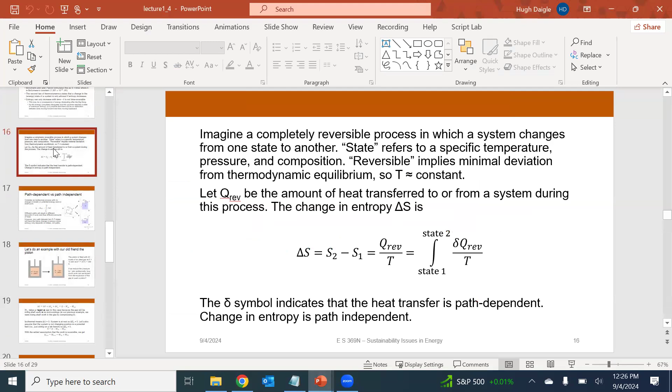Okay, but anyway, back to our piston. Okay, so just to recap, there's a question back there. Yes. It depends. The answer is there can be, but it depends a lot on the details of how the electricity is being generated, from what non-renewable source. So yeah, in the extreme case, and it's kind of like what we were talking about with electric vehicles, right? If you're running off of 100% coal generation, then no, you're not going to come out ahead. If you're running off of a typical mix like what you have in the US, then yes, you will come out ahead. But obviously, the most ahead that you can come out is with 100% renewable.

And one of the reasons that this company was planning to do that is because there are significant tax incentives in the 45Q tax credits in the Inflation Reduction Act for carbon capture using 100% renewable. That's the most tax rebates you can get, by that technique. So from a financial standpoint, that's why they were doing that.

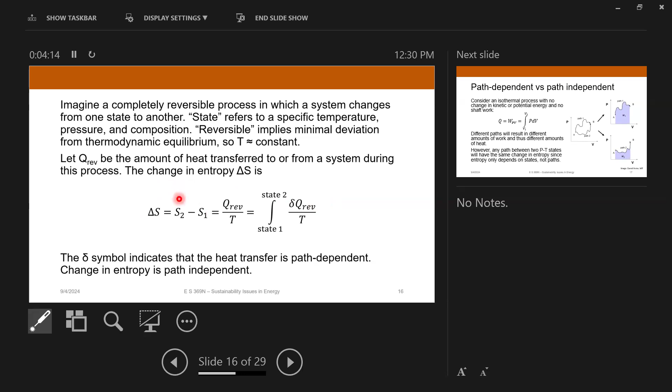Okay, so we're using this lowercase delta here to explain that the heat transfer does depend on the path you take in pressure, temperature, or composition space. And I'll explain this on the next figure. But the change in entropy is independent of the path you take in that space. So here's what that means.

So don't worry about this here on the left right now, but let's imagine that we are changing states simply in pressure volume space here. So you're going from state A to state B. And there's an infinite number of ways you can do that in pressure volume space. You could take path 1, which looks like that. You could take path 2 that looks like that. You could take any number of paths through that space.

And if you're an isothermal process, the heat transfer is simply going to be equal to the pressure volume work. Remember, we derived that on Friday from the first law of thermodynamics. And you get that work by integrating between V1 and V2 over the path you take in PV space.

Okay, and where you get the path dependence is because remember that when you're integrating, you're just calculating the area under the curve, right? So the area under path 1 is going to be larger than the area under path 2. That's explained very nicely in this figure over here. So to travel on path 1 is going to take more work than traveling on path 2. So that is a path-dependent process.

But overall, the change in entropy is going to be the same because it really just depends on the difference in the two end states, right? You have a certain number of configurations that the system can attain at point A, and you have a different number at point B. But that doesn't depend on how you get from point A to point B. That is a path-independent process.

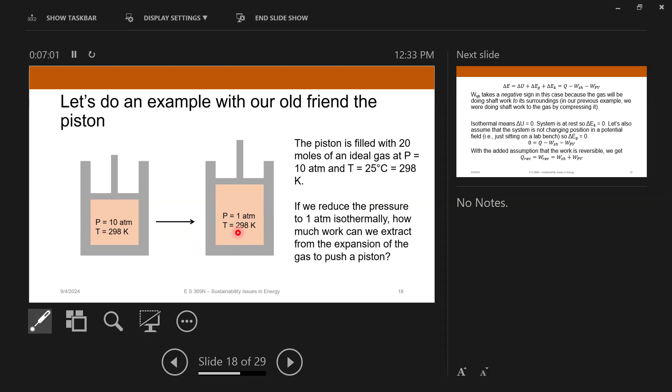Now, if we do an isothermal expansion here where we reduce the pressure to 1 atmosphere, so this is our end state, 1 atmosphere, 298 Kelvin, how much work can be extracted from that gas expansion? Okay, so we're going to go back to the first law of thermodynamics.

So the change in energy is going to be the sum of the change in internal, potential, and kinetic energy. And that's going to be balanced by the heat transferred to or from the system, and then the shaft work and the PV work being done by the system. And remember, these are negative signs because the system is doing the work on its surroundings, right? It is expanding, it's pushing stuff out of the way.

Okay, now because we're isothermal, delta U is 0. We'll assume the system is at rest, so the change in kinetic energy is 0. Let's assume that we're not changing our position in any kind of potential field either, so change in potential energy is 0. So that means that the sum of these terms over here has to be equal to 0.

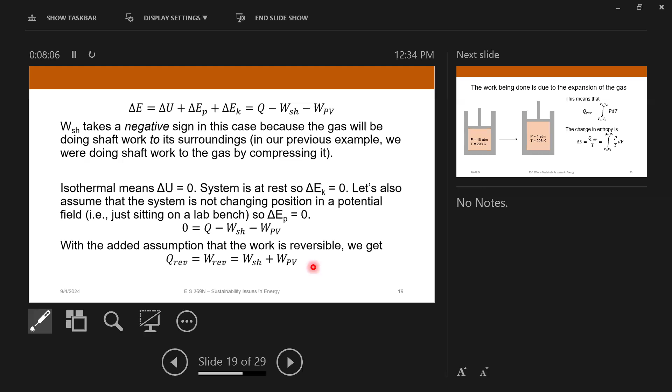And so that means that the heat transfer, we'll call that reversible heat transfer, is going to be equal to a reversible work term, which is just the sum of the shaft and the PV work, okay? Now, the work being done here, it's due to the expansion of the gas. And so remember, as we talked about before, the heat transfer, you get that by integrating along the path between the two states.

The composition is the same, the temperature is the same, but the pressure is different. So again, remember your PTX, we're changing the pressure in this case. So these are two different states here. And the change in entropy is just going to be the reversible work divided by the temperature, and we can substitute that into our integral here.

So if we have an expression for pressure and temperature as a function of volume or some way to relate those three things, we can actually come up with an analytic expression for this integral, okay? And so that type of relationship that links pressure, temperature, and molar volume of a material is called an equation of state. And the easiest one that we've all learned is the ideal gas law. That is an equation of state, PV equals nRT.

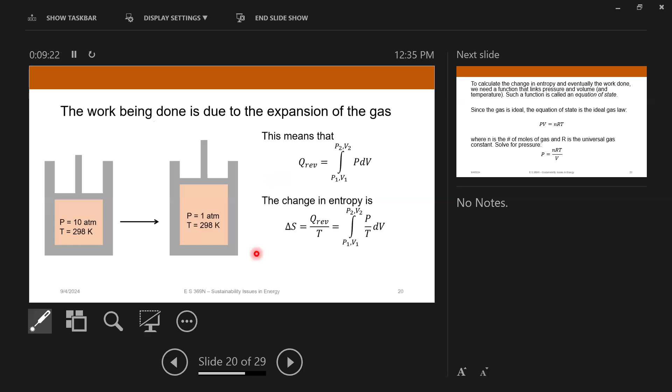And so we can solve this for the pressure like this. And now we can substitute that in here into our integral. And so this is what we get for the change in entropy. So I've substituted the ideal gas law in here, and then the temperature cancels out. So now it's just in terms of molar volume. And so the change in entropy is just given by the molar volume at the beginning and at the end.

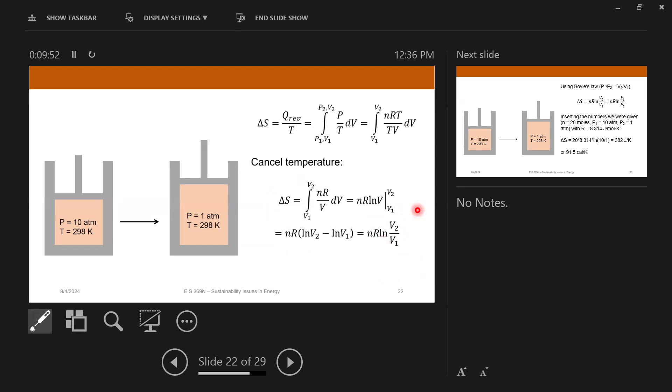And so again, you can see there's no path dependence here in the entropy. All I care about is what are my end state molar volumes. That's the only thing that matters here. Okay, and so now we can make a substitution for volume instead in terms of pressure using Boyle's law. And now we can see that the change in entropy is done by just plugging in all the numbers we get. And so we are getting a change in entropy of 382 joules per Kelvin, or 91.5 calories per Kelvin.

So that's how you express entropy. It has units of energy per temperature. So that's kind of an interesting way of thinking about it. So that is the change in entropy between these two end states. And again, you can see that the delta S is positive. So we have increased the entropy of the gas here.

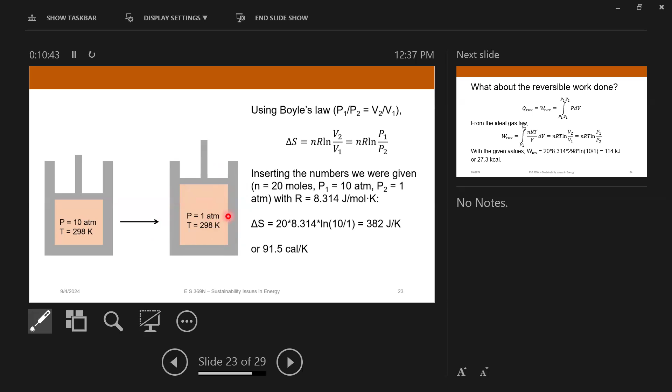Okay, and we can now calculate the reversible work that's being done by the same process. Inserting the ideal gas law, we now have the temperature over here on the right, so now we need to know the absolute temperature. But knowing that, we can see that the reversible work that was done in this case was 114 kilojoules. So that is the total amount of work that we can expect this expanding piston to do on its surroundings.

Now we can also separate out what's the pressure volume work that's done. And that is just integrating, again, the pressure with respect to molar volume. And because the final pressure is a constant, that just gives us this. And we can substitute the ideal gas law, so everything is in terms of pressure. And we see that the pressure volume work was 44.6 kilojoules. So that is work that you can't use for anything useful because it's the work of the gas just pushing stuff out of the way.

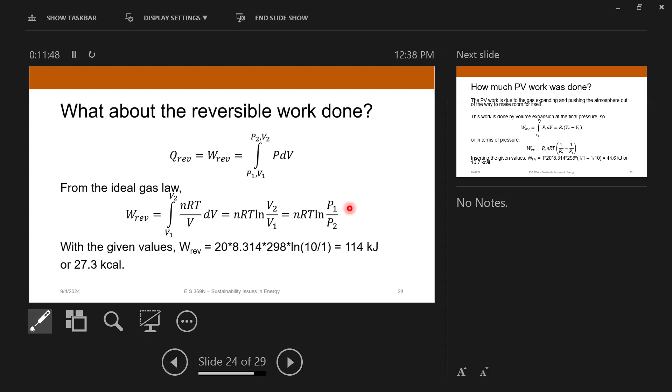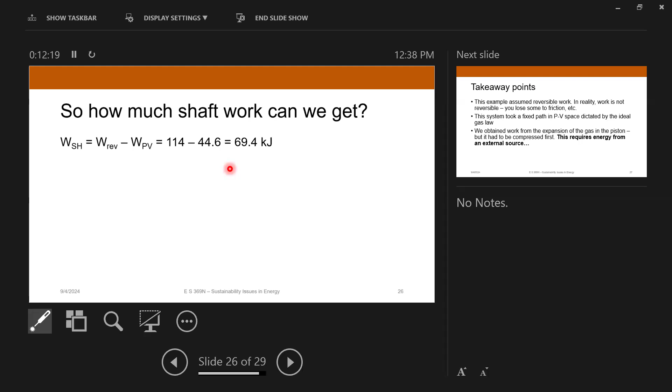So the total reversible work was 114 kilojoules. The PV work was 44.6 kilojoules. And so the usable work, the shaft work that we can actually get from this process, is just the difference between those. So it's 69.4 kilojoules. And that would be, say, if you compress that gas and then you let it expand, like in an internal combustion engine, that is the maximum amount of energy that you can get from that expansion. Again, this assumes 100% efficiency and all that good stuff.

Okay, so the takeaway points of this little exercise here about thermodynamics and entropy is that, first of all, we assumed everything was reversible. It's generally not going to be reversible because of losses to friction and that sort of thing. And so that means that we'll probably get less energy out of the system than we would calculate.

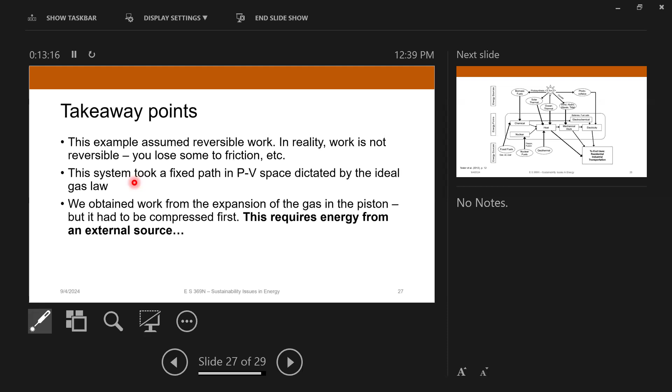And the other thing is that we started off with a compressed gas, and you have to compress the gas somewhere to begin with. And that requires energy from some kind of an external source. So you have to put the energy in to be able to extract it at the end of the day. It's not a perpetual motion machine, right?

And so the places that we get that energy from can be a number of different things, but the main things we are concerned about here is going to be energy that produces heat, mechanical work, and/or electricity. And those are really the things that we use in our everyday lives in terms of energy. We use electricity for a lot of stuff, right? We use mechanical work. That's important. Like if you go take the elevator, that is energy being used for mechanical work.

And then heat is another thing. A lot of the time we are producing waste heat, but in the winter when it's cold, you might use energy to actually produce heat. And I guess if you're running the air conditioner, that's kind of the opposite of heat. So it's a backwards heat pump. But these are the things that energy is producing. So just remember, anytime we're talking about sustainable energy, we're using it for these end uses. And it's not just electricity, it's not just heat, it's all of these things combined that are useful.

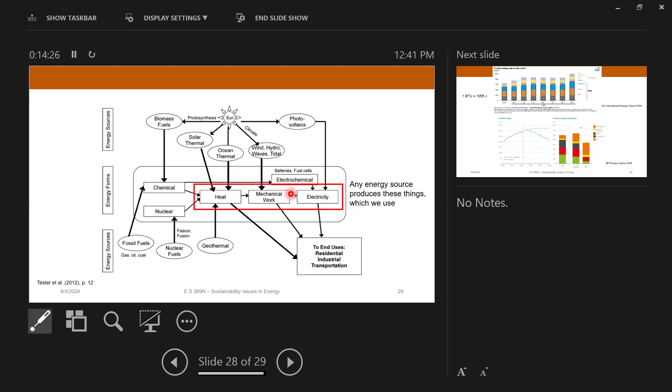Okay, I want to close with this slide that I showed earlier. So there's a lot of discussion about what the mixture of energy sources is going to look like in the future as the energy transition progresses and we make the transition to lower carbon forms of fuel, decarbonizing electricity production, that sort of thing. There's a lot of different organizations out there that make these forecasts about what they think the energy mix is going to look like.

The couple that I like to look at are the Energy Information Administration, which is part of the US government that aggregates energy statistics and makes forecasts and reports and that sort of thing. Every year in about November, they put out their International Energy Outlook. So the data I'm showing you here are from last year. Hopefully over the course of the semester, we'll get the next installment.

But what you can see is looking at the numbers from 2022, primary energy use around the world was dominated by fossil fuels. You can see that renewables are up here at the very top, accounting for less than a quarter of worldwide energy production. They run a whole bunch of different scenarios here, mainly based on prices of materials and commodities. So you can see, they're considering the cost of zero carbon technology, economic growth, different oil price cases.

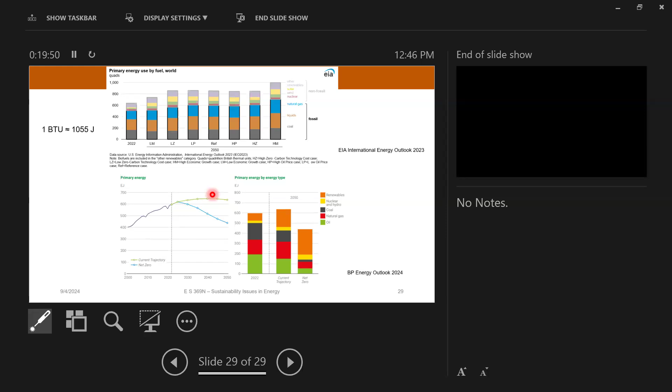I'm just going to give you a little preview of what we'll talk about on Friday, which is the energy transition and what that really means. I know that some people like to say energy expansion, some people like to say energy transition. I think transition is a more appropriate term. But I'll close by showing you guys this figure here.

So this is looking at primary energy consumption in the United States going back to 1950. And you can see that since 1950, the dominant source of energy, and remember, this is not just electricity generation, but all uses of energy, has been petroleum, so oil. Natural gas has really taken over recently. But I think the biggest story over the past 20 years or so is what's happened to coal.

It's really come down. And if you think about the growth in renewable energy, when you compare it to the total energy consumption, it's still minuscule. So this is an interesting thing to ponder about how that might change in the future.